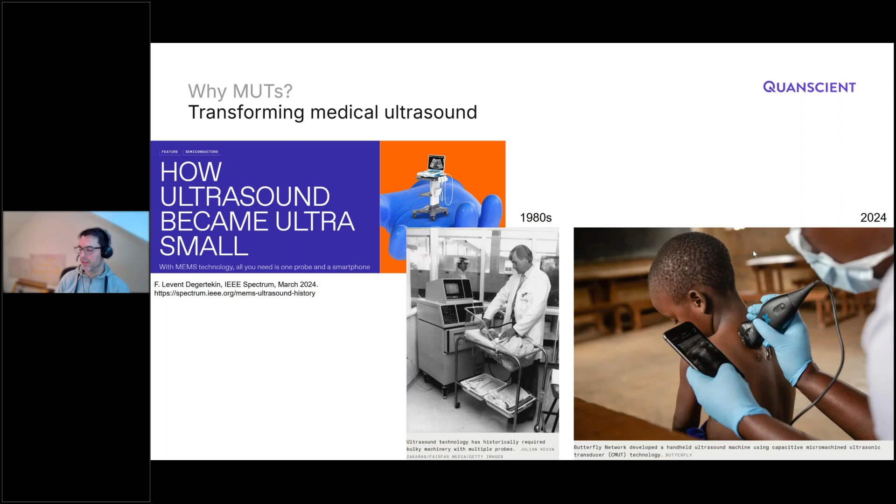This is where we've reached in 2024, and both from this article, I should add, and the compact, really beyond compact, I would say, capabilities that have come to ultrasound in recent years have really been driven by the development in MUT technology. So what we're talking about here is relevant. People are doing real things with this technology.

So why is it a challenge? Well, we're talking about highly complex MEMS sensors, a lot of very detailed small structures. The arrays themselves are, albeit they may be 64 or 128 addressable elements, the actual number of cells within that can run into the thousands. And as a result, these simulations can run into tens or even hundreds of millions of degrees of freedom. It's beyond the scale of what's typically attempted in traditional FEM packages.

The devices are broadband. It's one of the attractive aspects of the technology. So it means that transient analysis is very relevant, but as we know, that's a relatively expensive technique. They're inherently multiphysics, obviously with some differences between PMUT and CMUT. And there's many innovative structures being explored. We're starting to see a lot of work towards creating more broadband devices.

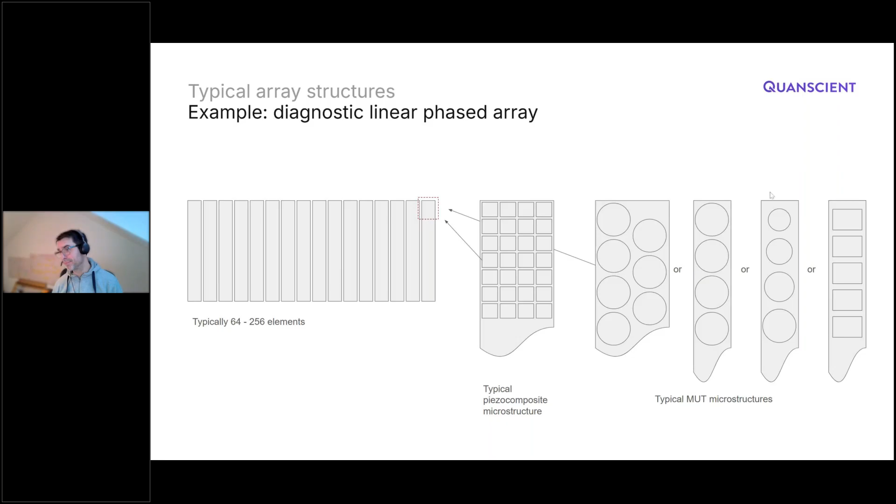They could be various different arrangements of cells in order to populate these elements. We've got different structures here which offer differing advantages in terms of layout, fill factor, potentially broadband, and even the shape of the cells can vary: rectangular, square, oval, circular. There's a huge range. So there's a lot of variation there. But as we know, there can potentially be thousands of MUT cells within a phased array. So how do we approach that? It's not traditionally been possible to simulate large sections of these arrays.

So we typically start in simulation with what might be called a unit cell, the smallest little section that can be tiled out that somehow represents a section of this full array. And that can give us some good fundamental ideas of what we might call the acoustic stack, the fundamental design of the membranes and the transducer layers.

When we move on from that, we can go into various cross sections here. So we've got an elevation cross section, essentially a model of a whole element, or potentially using symmetry, a half or a quarter of the element. Or we can go in the other direction and take a cross section along multiple elements of the array. So we might talk about an azimuthal cross section. And these are good. Each of these can get us good estimates for beam patterns in the particular cross section that we've built the model.

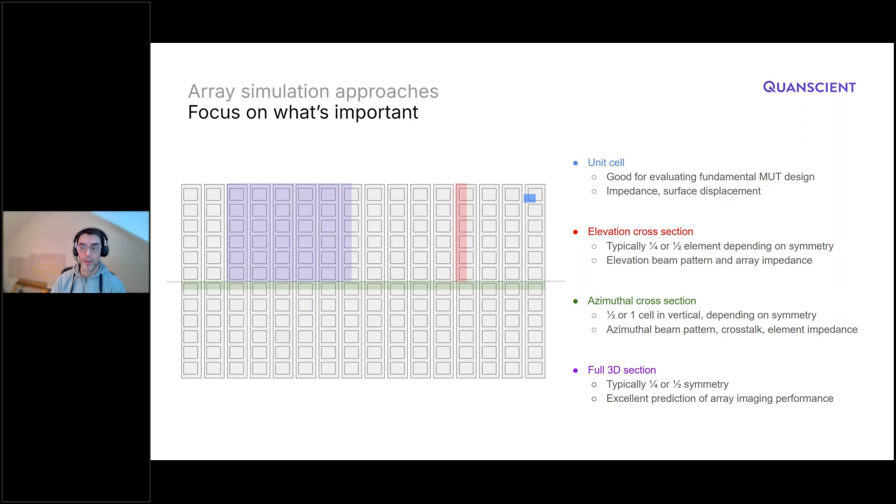But ideally, to consider the full structure and the ultimate performance of the array, we really want to simulate large 3D cross sections. So ideally, we want a package that can allow us to progress through this series of models, building up in complexity, potentially running thousands of designs at the simple stage before we encounter very large models and therefore longer computational times.

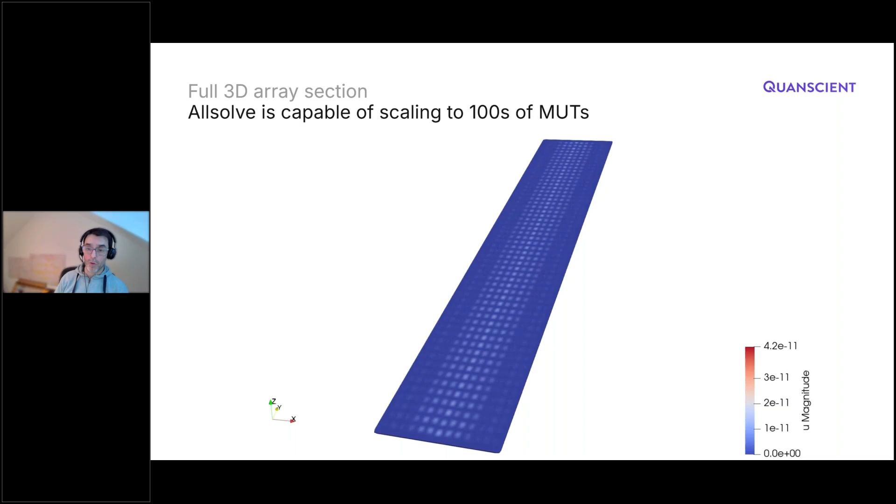So a little spoiler, I thought you might have been listening for 15-20 minutes by this point. So this is what we're building up to, a full section with over 700 MUT cells in an array. We've excited a central element here. You can see crosstalk moving out. So that's what we're working towards. That's what Allsolve enables. But let's look step by step at how we get there.

So I'm going to focus on PMUTs to begin with, and I'm going to use this paper from Professor Horsley's group over at BSAC in Berkeley, which I've used before as an example.

It's an array that was originally designed, the paper was written around fingerprint sensing. But what we're going to do here is look at this array as if it was a linear array for diagnostic imaging. We're going to operate it into a water load, and we're going to pull out some of the things that we would be interested in if this was a diagnostic imaging linear array.

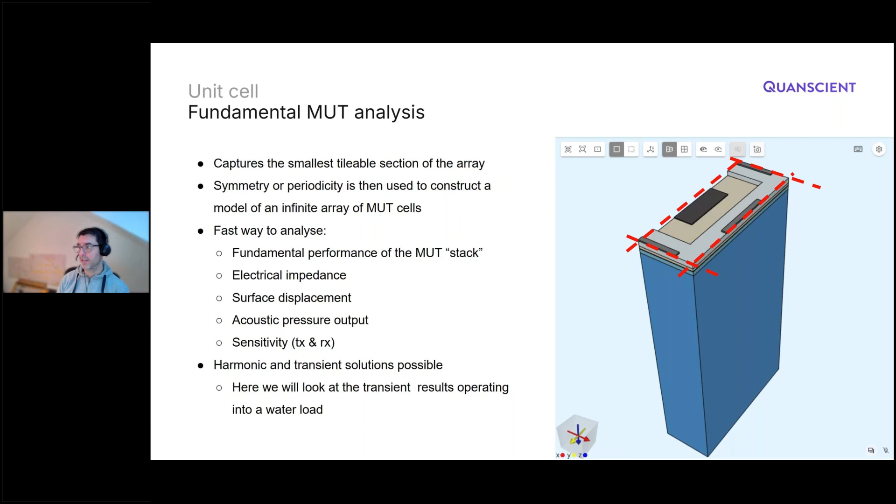So as I mentioned a couple of slides ago, the simplest model we can construct is what I would call a unit cell, the smallest little section that we can tile out to create an infinite array of PMUTs. And that's what we've got on the screen here. So we've got a representation of the PMUT structure that we saw on the previous page, where it's got a silicon oxide carrier structure, an aluminium nitride piezo layer and a silicon membrane on the top, and we're operating this into a column of water. So it's a very simple model. It's got symmetry applied along the red dotted lines, but we can get quite a lot of good fundamental information out of it. So we're going to run some transient simulations on this to show some of the basic performance.

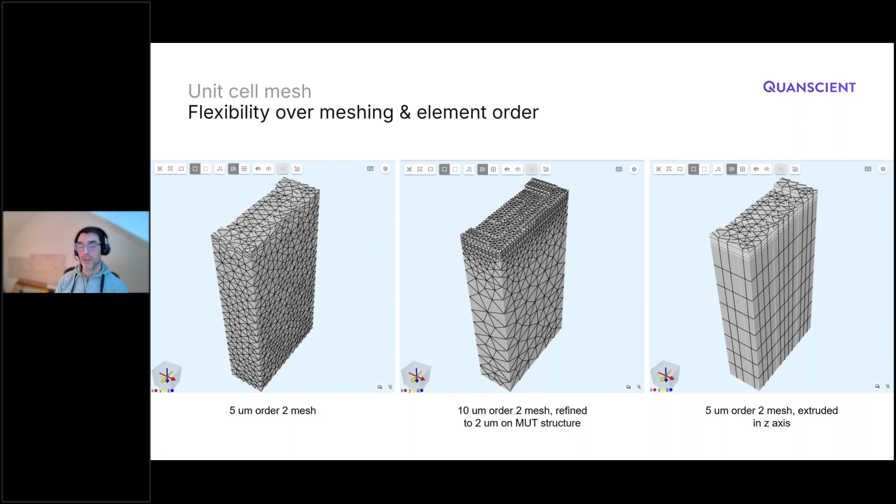Now, before jumping into that, it's difficult to talk about finite element analysis without talking about meshing, everyone's favorite subject. And I promise this is going to be the only slide that I show any meshes on. I wanted to show this basically to demonstrate that there's a huge amount of flexibility in Allsolve's approaches to meshing. We can have structured meshes, unstructured meshes, hybrid approaches. We can refine different areas of the mesh. Ultimately, it comes down to your requirements. The best advice I can always give on meshing is build a simple model like the one we have here and run a mesh convergence study. Pick the outputs that you care about, see how they converge with meshing, and that allows you to choose the right mesh for your device.

So we're going to excite this model. It's going to be a transient simulation. We're going to excite it with a short voltage wavelet, and we can observe various things happening in the model. So the first thing we'll see is the current, and if we look at an animation of the field outputs over time, we'll see that we get some displacements in the membrane itself, and we observe a pressure wave traveling out into the water column and being absorbed at a PML at the base.

Now, I should have said a couple of slides ago, I've oriented all the models in this slide deck in the same way, with the waves propagating down the way. The only reason for doing that is that it's a little bit easier to see the MUT structure and the load in one view. I hope that doesn't confuse anyone.

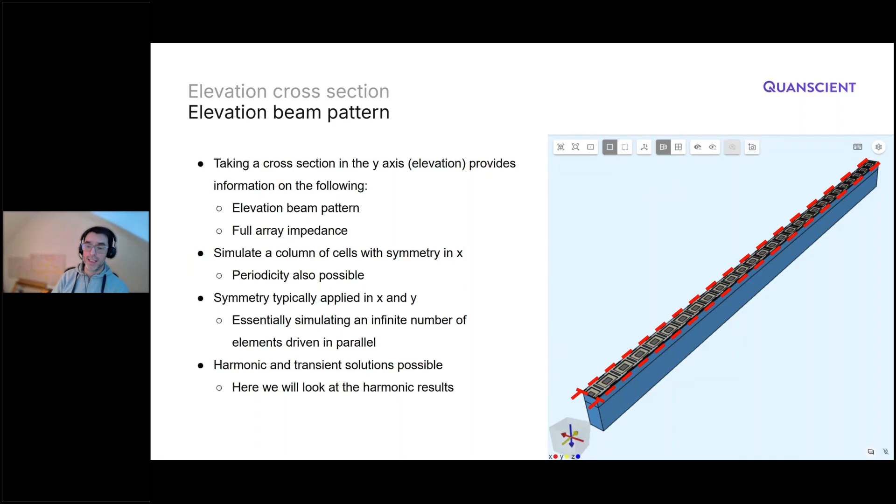And what that's going to let us get out on top of what we had before is the beam pattern and potentially the electrical impedance of the element. I've not shown that here. This design isn't particularly resonant, so there's not a huge amount to see in the impedance plot. And we're going to do that in this case using a harmonic solve. That will give us the CW displacement and ultimately beam pattern from this element. And that might be often a convenient way to measure in practice.

Okay, so we're starting to get a feel. Sorry, Andy, just to hop in for a second. There was a question just a couple of minutes ago asking what change do you expect in far field compared to near field? That's a very good question.

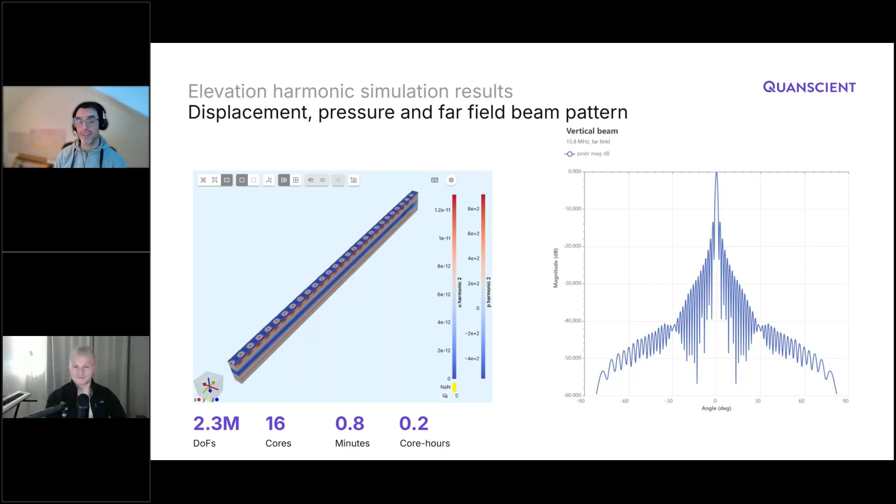So we've looked at this design through an elevational cross section. Let's do the same in azimuth. So back to you. Yeah, thanks, Yuka. So here we're taking a cross section along X in our model, but in the azimuth direction. And the key use of this model is simulating crosstalk along the array. So we're going to simulate a driven element at the center, and in this case it's got half symmetry applied to it. We're then going to simulate passive elements adjacent to it, in this case another 6 of those, and we're going to observe crosstalk moving out.

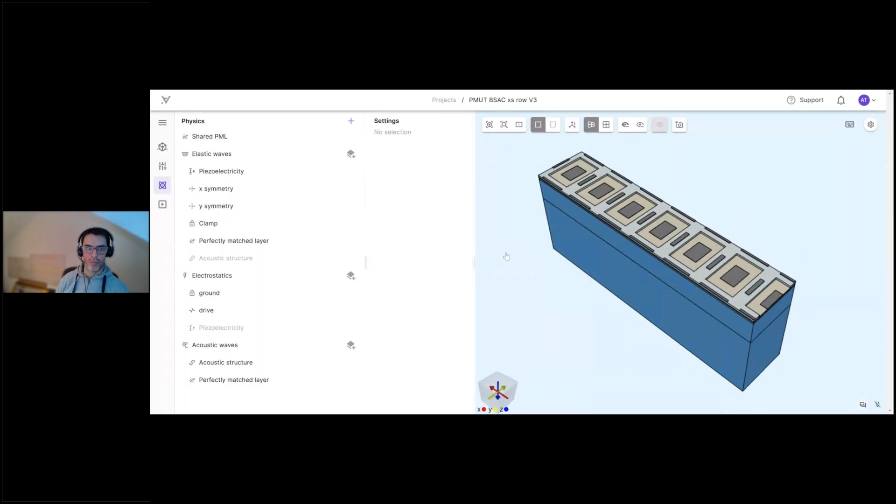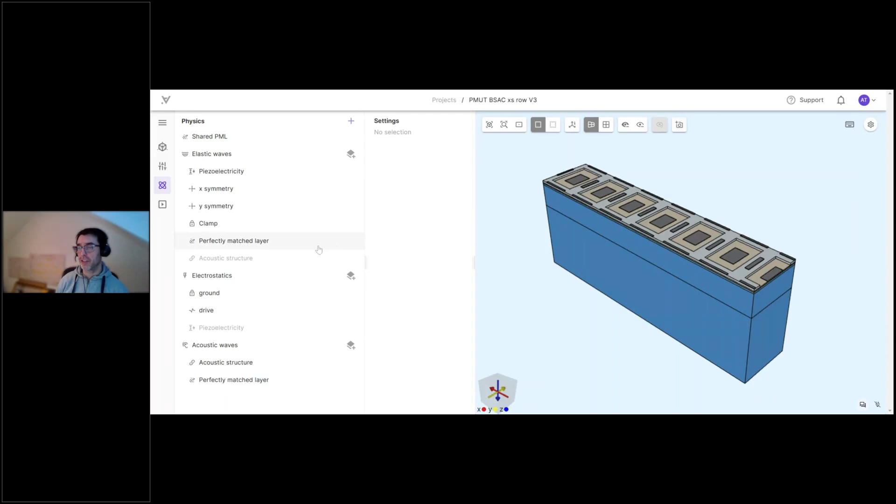Now this is actually a point where I wanted to jump into Allsolve itself and do a quick demo. So as you can see, Allsolve runs in a web browser. So I've just flipped to another tab in my browser here, and I've got a model that I can manipulate. I've built this structure within Allsolve, but equally I could have imported that from CAD or GDS2 files. There's a lot of flexibility over how that's done. I'm not going to go into the model construction here.

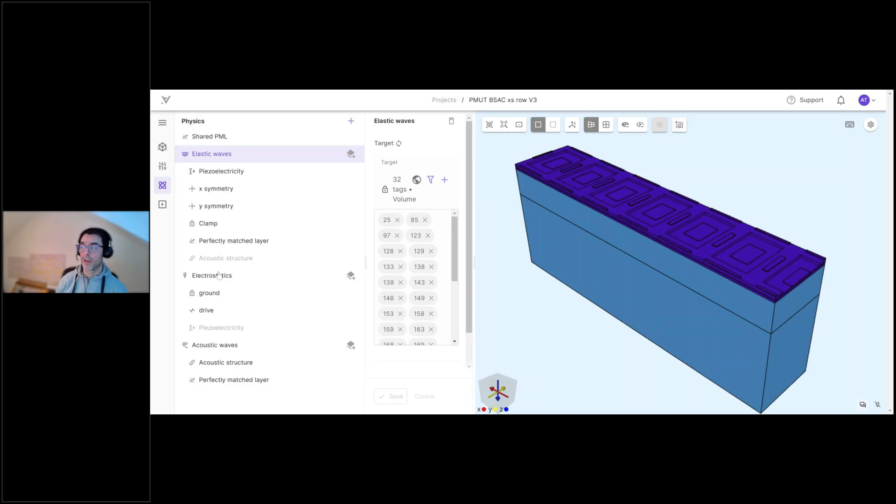What I wanted to just highlight was, in a PMUT, the different physics regions that we're enabling. So in the device itself, we've got elastic waves. We're simulating electrostatics and piezoelectric coupling within the aluminium nitride layer. And then we're going to have acoustic waves applied to the water load. We can quickly go through and look at some of the different boundary conditions. So we've got symmetry in X here.

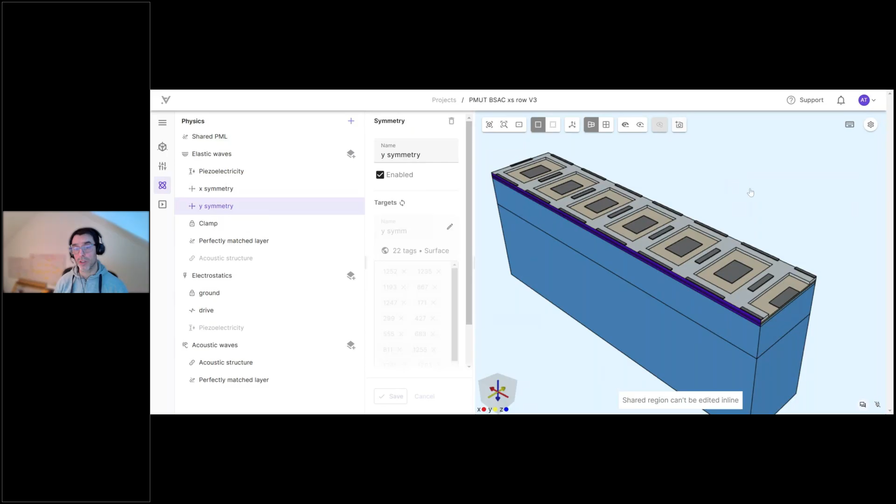We've got symmetry on either side for Y. So in the elevation direction, we're going to have an infinite stack of elements. One interesting aspect that I wanted to highlight here is that in the paper that this is based on, we have the MEMS wafer bonded to a CMOS wafer through these little interconnects.

Now, the exact geometry of those isn't specified, but it brings up a very important topic, especially when we're talking about crosstalk: the boundary conditions, particularly at the rear of any MEMS structure, and how we impose them will have a big impact on the crosstalk that we see in the device. For this simulation, we've modeled some of the electrical interconnects, and we've imposed a clamped condition to the rear face of those. So we're saying that the CMOS wafer is rigidly clamping them.

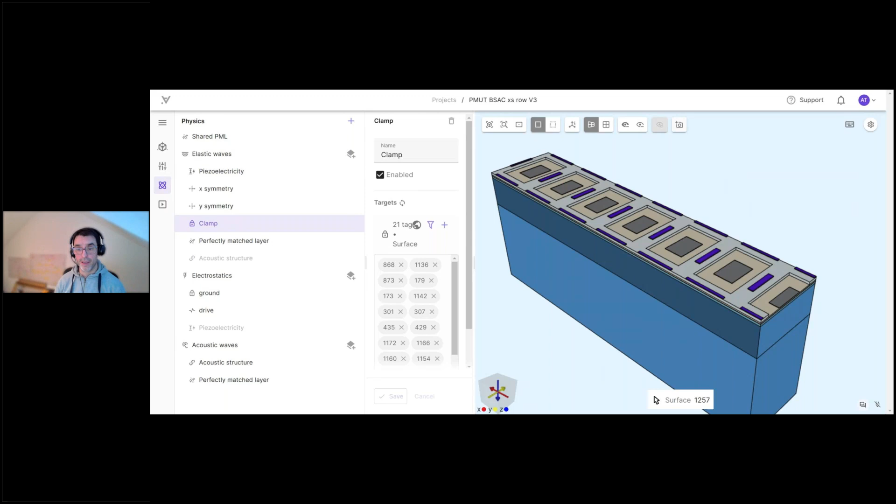Now, what would be really interesting and might be work that we do in the future is to model at least part of that CMOS wafer and try to understand how big an impact that has on the crosstalk modes that we see. So that might be something that we do some work on in the future, and please let us know if that would be of interest.

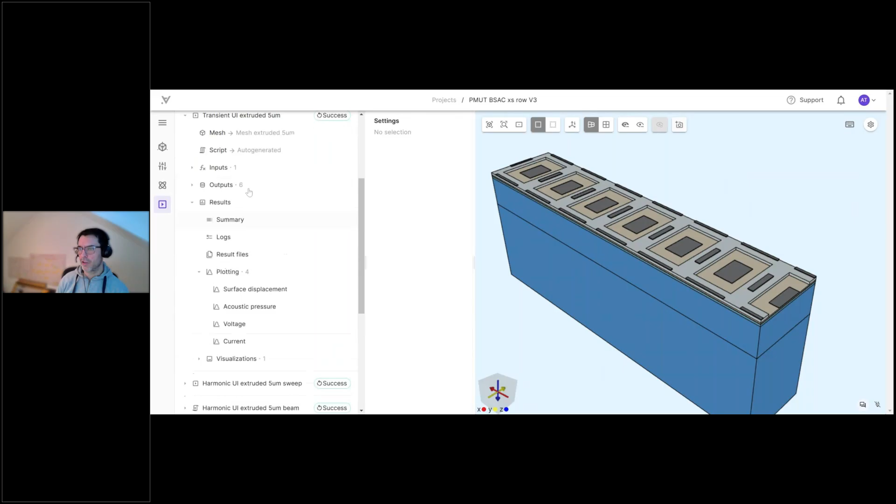I'm going to move on to some of the simulation results because we've got quite a lot still to get through. This is a transient simulation I've selected from quite a long list of simulations that I've run. We can pull out things like surface displacement, acoustic pressure, the drive voltage that we've imposed as a boundary condition, and as I showed before, the observed current on the device.

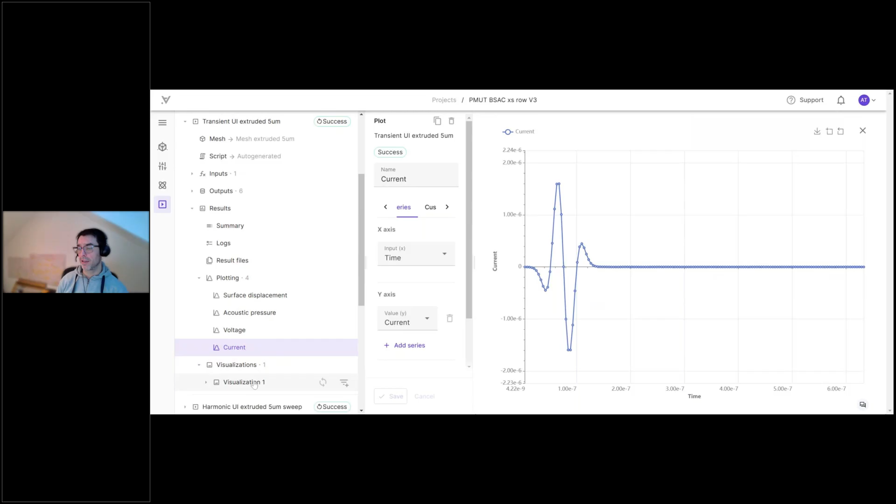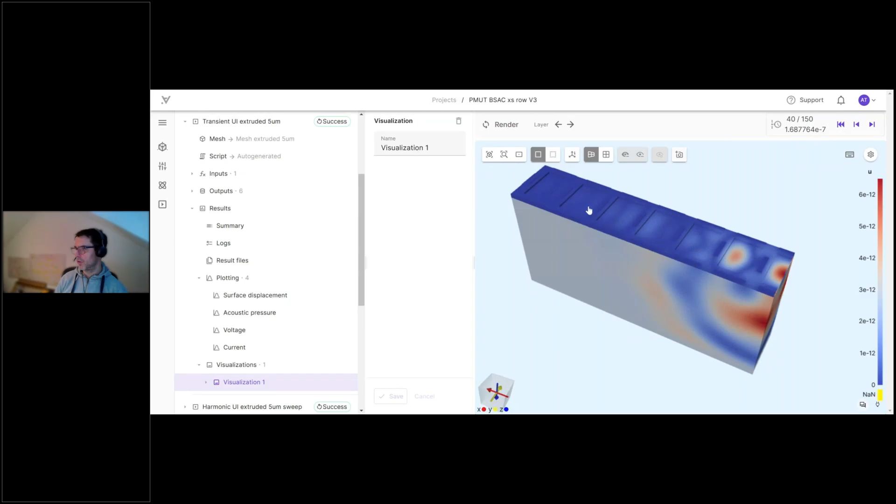Or indeed, if we want to move across here and look at the fields on the device at, let's say, the 40th time step, if I just rescale that, we can see quite a broad wave leaving the device here, and some elastic wave modes propagating across the structure itself. This is the main driven element here. So it indicates to us that we're seeing some crosstalk. It would be interesting to find out a little bit more about that.

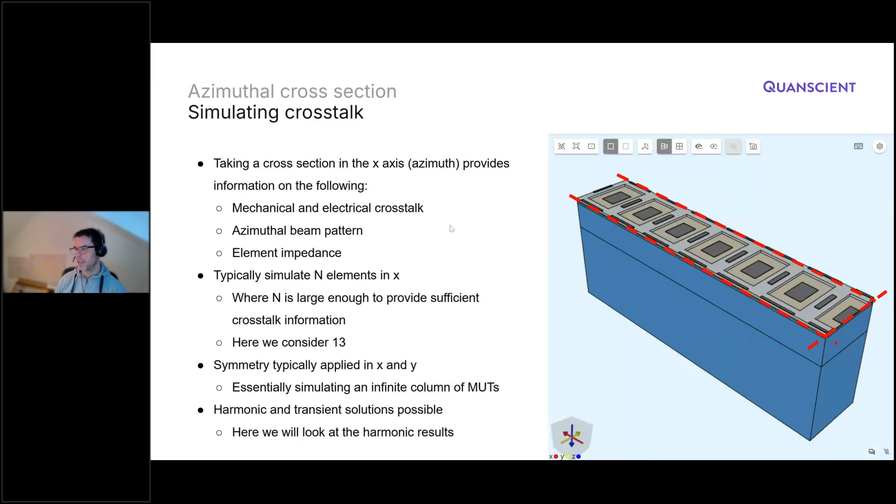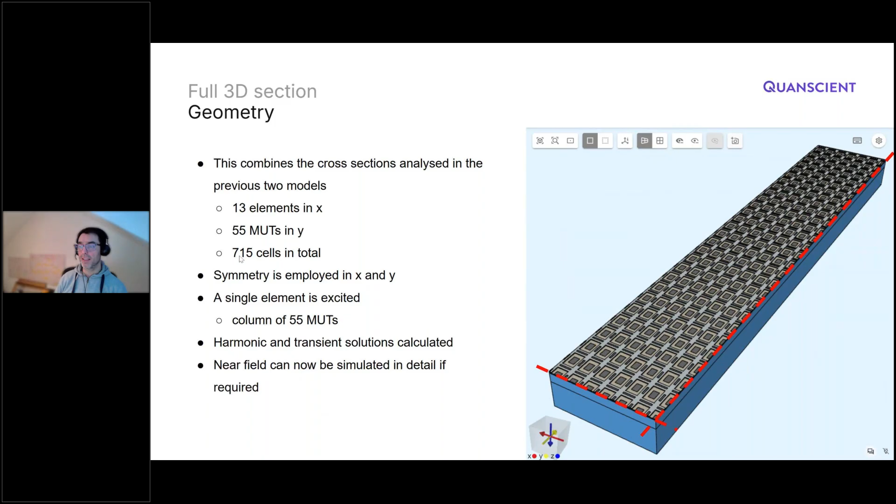So we've run unit cell, we've run cross-sectional models. I wanted to really demonstrate what Allsolve can do at a larger scale. So this is a full 3D section of the device. We're going to drive this central column of elements, and we're going to observe crosstalk moving laterally through the device. It's essentially a 13 element section of the array from the paper, with a column of 55 MUTs when you account for symmetry. So, symmetry considered, we're essentially simulating 715 cells in this device.

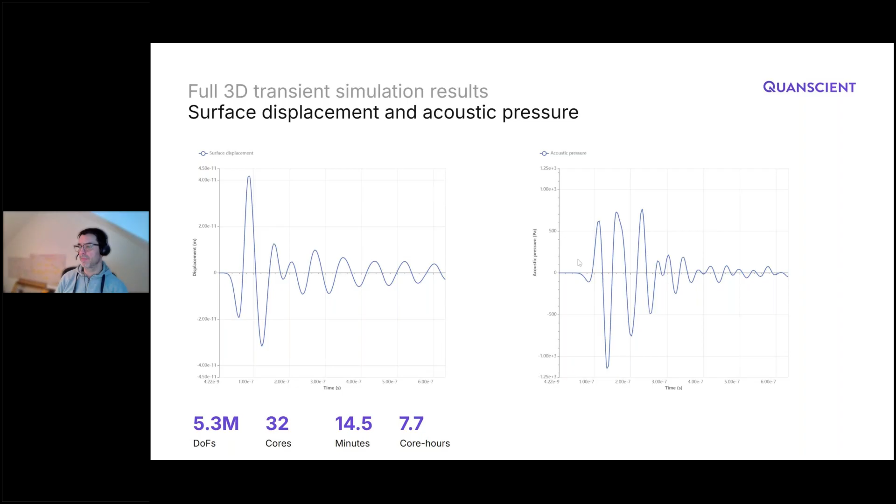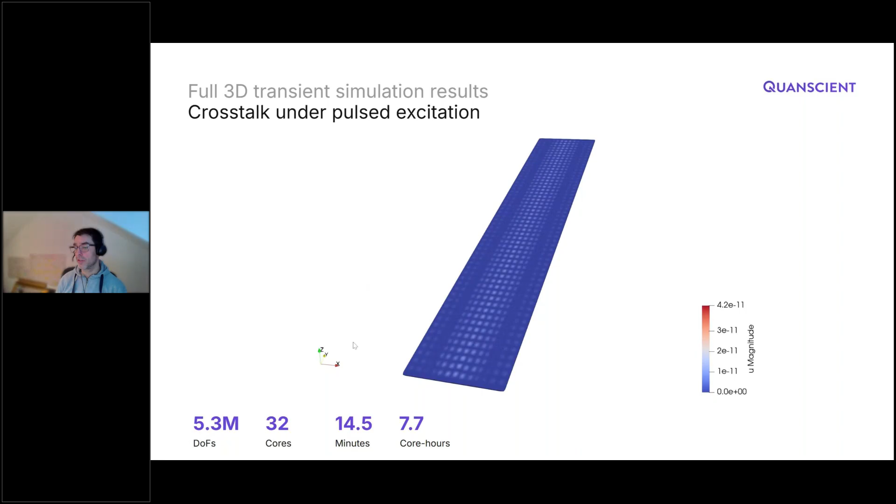This whole simulation was executed in under 15 minutes. It's parallelized using domain decomposition across 32 cores. So even though for a transient solve it's around a 5 million degree of freedom model, we can still execute it very quickly. And indeed, we could go larger if we needed to. We can do the same thing with a harmonic solve.

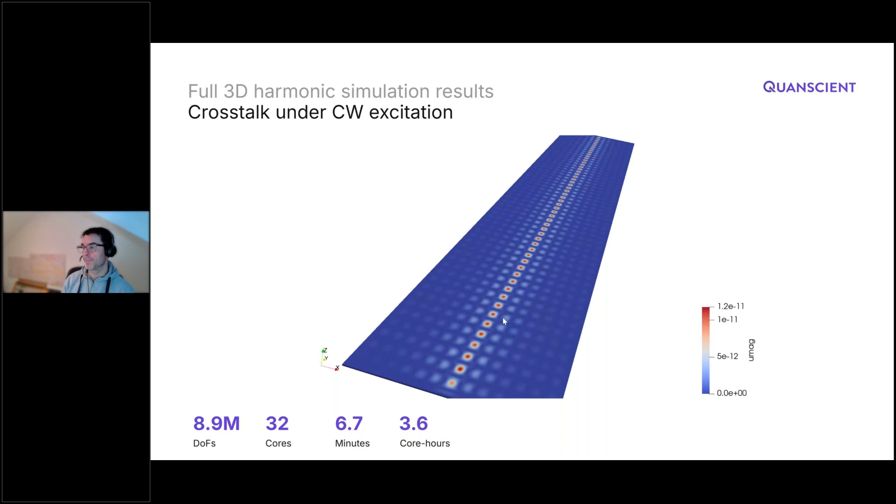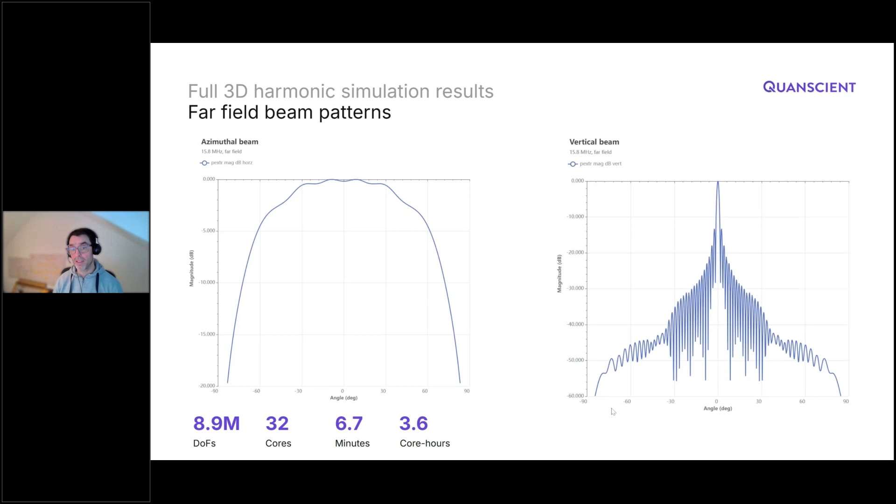But as I said, we now have the freedom to consider much more complex designs that maybe don't support the sort of symmetries and uniformity that cross-sectional models would completely capture. So that is what I had to cover on PMUTs. I wanted to speak a bit about CMUTs as well, but I didn't want to go through the same process again with a CMUT design. So really what I wanted to focus on here is what's different and how do we tackle that.

So there's a lot of similarities. CMUTs are still MEMS devices. We can still use some of the same simulation strategies that I've just covered, but we've got different physics to consider. We're considering electrostatics rather than piezoelectrics. We've got biasing, we've got non-linearities to consider. Potentially, if we're operating in collapse modes, we've got contact conditions to think about. So all of these bring in layers of complexity.

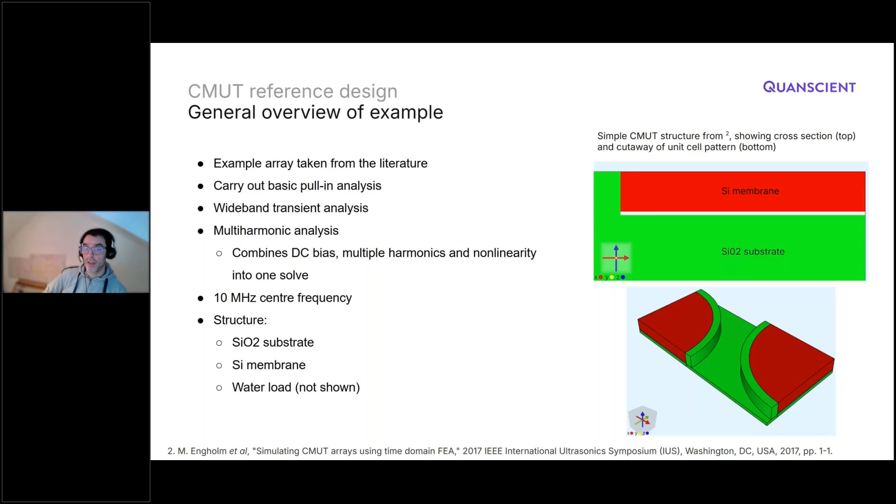So similar to what we did in the previous slides, I wanted to start with a reference from the literature. This was some work that I was involved with back in 2016, 2017 with the team at DTU Nanotech in Denmark. We did some work on various CMUT designs, and this was quite a simple design that we used to look at pull-in curves. We used to do transient simulations, and we're going to recreate some of that here, but also then go on to look at Allsolve's fairly unique multi-harmonic solver, and I'll talk a little bit about that in a minute.

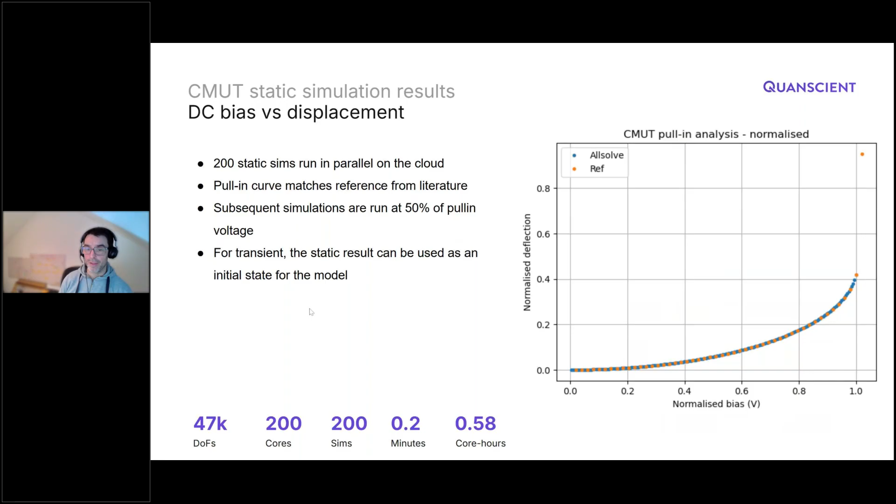So Yuka mentioned sweeps earlier, and it's something that I usually talk a lot about. This is the only place I've used it in this presentation, but essentially we've got a pull-in curve showing normalized bias voltage versus normalized deflection, and we were able to recreate the results in the paper. We ran 200 static simulations in parallel and completed it in under 30 seconds. So a lot of parallelism and speed.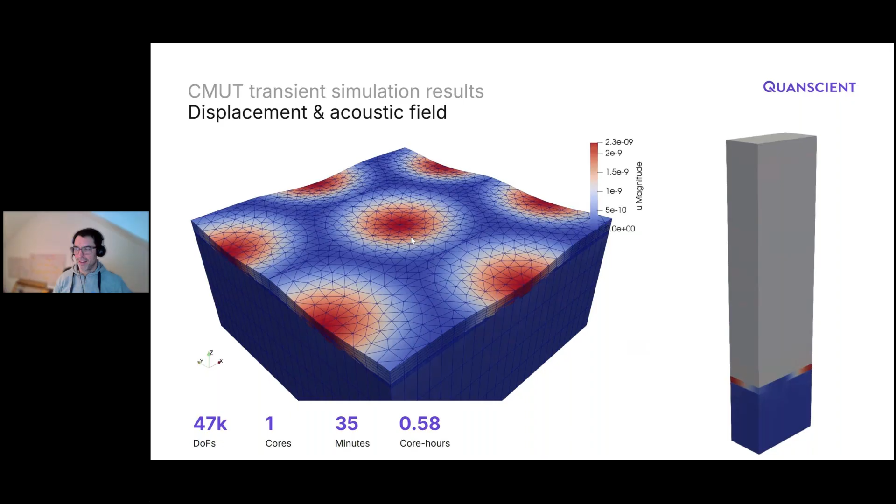We can then use these static bias points as a starting point for a transient simulation. So this is, I think this was about 50% biased to 50% of the pull-in voltage, and then we applied a short voltage pulse to the device. I didn't really get this animation looking very good, but I hope it illustrates what we were doing.

And a little bit like the PMUT devices, this is a unit cell simulation. We've got displacement and pressure in the load. You can see, as is characteristic, these are extremely wideband devices.

And then this is something that I wanted to touch on a little bit more. We have quite a unique multi-harmonic solver, which allows us to simulate non-linear effects across many different harmonic components, including in this case the DC bias. So here we have a simulation where we have the DC bias with all elements driven in parallel at the same phase.

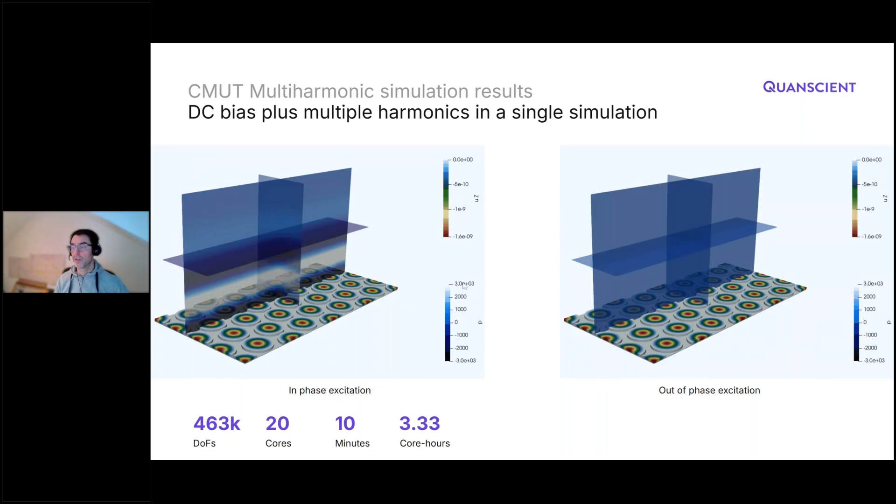And then we have a simulation where we've applied some phase differences between adjacent elements, really just to illustrate the flexibility of that solver. It's a very powerful approach for situations where you have nonlinearities and potentially multiple drive frequencies mixing together. So it's a really good companion to the transient solves that we would typically do in CMUTs.

So I had to cover those CMUT slides quite quickly there. Apologies if that was maybe a little bit fast, but I'm glad we managed to get through all of that.